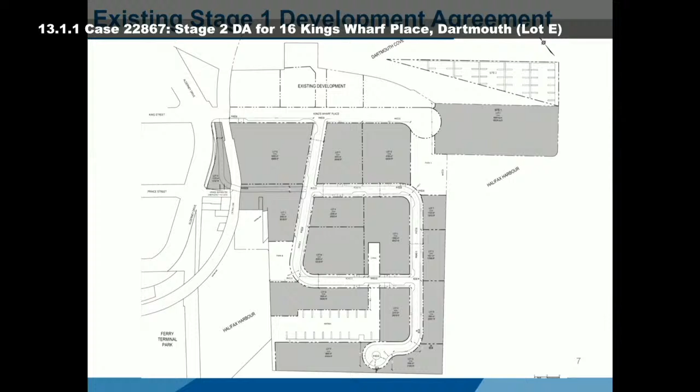This is the lot configuration approved with the Stage 1 DA. Lot E is shown here in red, abutting the CN rail line, Kings Wharf Place, and a new road, Road A, which is not yet constructed.

The proposal is for a 27-story mixed-use tower with an internal courtyard connected underground to a 4-story structure. The proposal includes ground floor commercial uses facing Kings Wharf Place, Road A, and the internal public courtyard, with pedestrian access to the internal courtyard from Kings Wharf Place and Road A. Vehicle access to underground parking would be from Kings Wharf Place. The site would also include a public easement beside the building and abutting the CN rail line to enable a future active transportation connection to Ferry Terminal Park.

This is a stylized rendering of the proposed building as seen from the corner of Kings Wharf Place and Road A. In the foreground is the 4-story structure with a 27-story tower visible behind. This is the elevation from Kings Wharf Place with the tower on the right and the 4-story structure on the left.

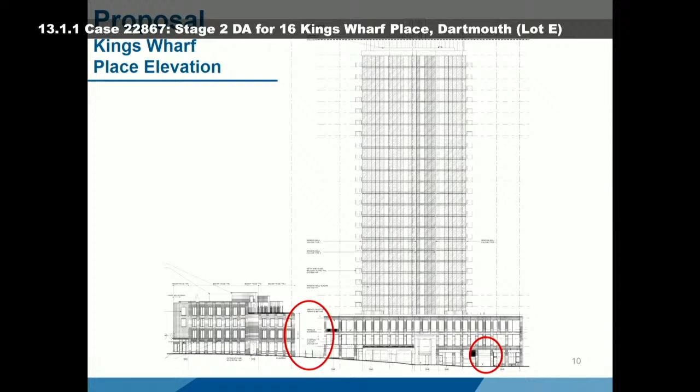Pedestrian access to the internal courtyard would be between the 2 structures. Vehicle access to the underground parking would also be from Kings Wharf Place. The tower includes a 3-story podium with a maximum street wall of 22 meters.

This is still the Kings Wharf Place elevation, here showing more detail of the 4-story structure. This part of the building could have a maximum street wall of 16 meters. The applicant's intention is for this structure to be a hotel use wrapped with retail uses facing the public streets, but the proposed DA is flexible on this point and will permit other commercial and residential uses.

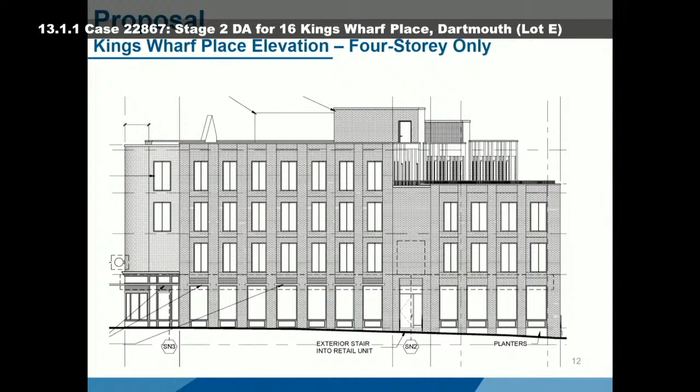This is the Road A elevation of the 4-story structure. There will be pedestrian access to the internal courtyard at the end of the street wall on the far left of this image. This street wall will be a maximum 15 meters tall.

This is the elevation that would face the CN rail line and Alderney Drive. So we see the 3-story podium on the left of this image rising to the 27-story tower.

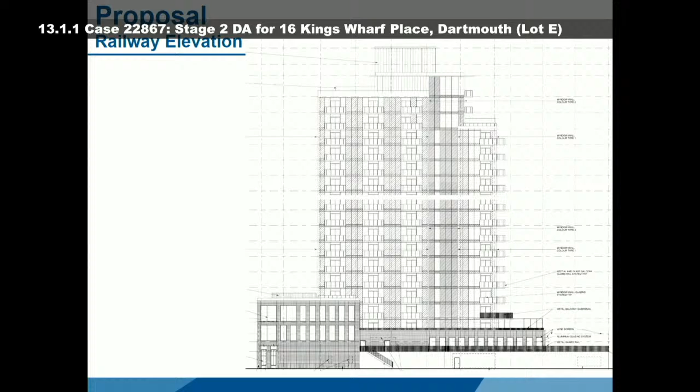Downtown Dartmouth Secondary Planning Strategy Policies W9 and W9B list the criteria for evaluating this application. The criteria most relevant to the Stage 2 DA are as follows.

Development should provide a mix of land uses, including residential uses with a mix of unit types, and high-quality urban design. Buildings should be designed to create public spaces and provide weather protection for pedestrians. Parking should be below grade or wrapped with active uses.

Microclimate issues such as wind, solar orientation, and shadowing should be considered, and pedestrian street level activities should be supported.

Proposals should respect that the waterfront is primarily a pedestrian precinct, and pedestrian circulation should be an important consideration. Buildings should be designed to create attractive and functional public spaces and pedestrian routes. Active ground level uses are encouraged adjacent to public access points and public open spaces. Public art should be provided, and architectural details should provide visual interest to the upper stories and at pedestrian level.

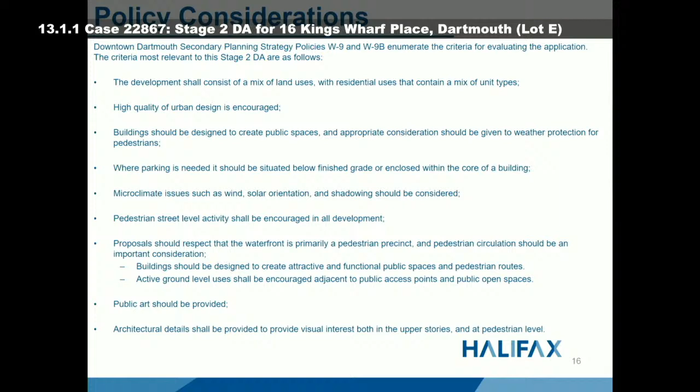The level of engagement for this application was consultation, achieved through providing information and seeking comments through an HRM website, signage posted on the subject site, and mailed fact sheets.

Feedback from the community generally included concern regarding public safety if additional dwelling units are permitted prior to a grade-separated emergency vehicle access into the site being complete, and concerns regarding traffic on Kings Wharf Place relating to vehicles queuing to wait for passing trains.

With respect to the microclimate conditions on the site, the Stage 1 DA required a wind tunnel assessment of the proposed development to evaluate expected wind conditions.

The wind report identified a maximum safe wind speed of 25 meters per second for more than 0.1% of the time from any given wind direction, and the wind expert recommended wind interventions for any area where expected wind speeds exceeded the safety criterion and were worse than existing pre-development wind conditions.

This means wind conditions in some locations on the site would continue to exceed the safety criterion after construction, despite proposed wind interventions. The proposed development would not be expected to make the pre-development wind conditions worse.

To summarize the proposed development: maximum height would be 82.5 meters plus some permitted overruns. Maximum street wall heights would be 22 meters and 16 meters along Kings Wharf Place and 15 meters along Road A. Bicycle parking would be provided in accordance with the land use bylaw for the regional center.

Also, one thing they were running into - if I can just pull these up, these are the two wind maps shown in the wind study. This is the summer image and this is winter. The circles with red and yellow are the problem areas. In any case, I think one of the problems they were running into is if they were going to mitigate wind further, they would have to do something off-site, and we couldn't do that.

It would either be in the public right-of-way - there's a very narrow setback. Most of that sidewalk is actually on public property, so we could do something in the public right-of-way. But other than that, it was quite challenging to improve the wind conditions more than what they've already done.

And yes, the criteria they used was that the wind conditions couldn't be worse than what's already there, and being a windy site, it's already challenging. Yeah, I think anyone who knows downtown Dartmouth well knows it's always about 5 degrees cooler as soon as you hit Alderney Drive, because you really do get that wind right off the water there. So thank you for the clarification on that.

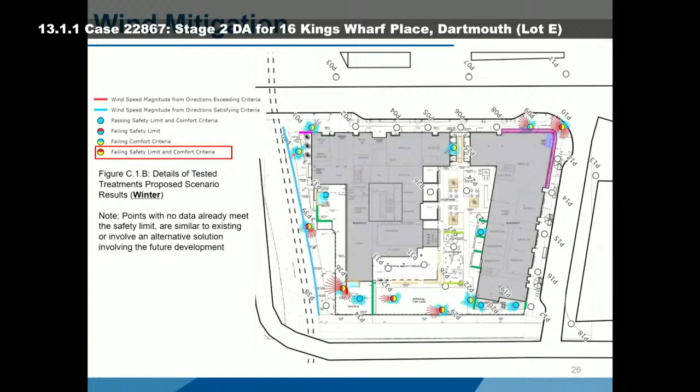To go back to the public hearing for Phase 1, one of the dominant themes wasn't so much design or scale - the community seemed pretty okay with the revised plan for Kings Wharf overall. That second access was one of the key things people in the development are really concerned about. Not everyone accepts that it should be emergency only. That's the decision we made, but others feel we really do need that emergency access finished. So can you speak to that - will it be coming back to council, but they can't occupy any of this building until that is built?

Yes, that's correct. So the grade separated emergency access would be maintained, the ownership will be maintained by the property owner, so as private property, it's a private road. HRM would have an easement over the road, and it would be, like you say, for emergency vehicle access only, it wouldn't be for personal vehicles.

So because it's private development and this property is entirely controlled by the Stage 1 DA, it does need a Stage 2 DA before they can do any development on any of the other lots. So we couldn't approve it with this application because it's not on this lot.

But you're correct, so the way we've kind of stacked the requirements for the grade separated emergency vehicle access: they need to have their design approved by CN and submitted to the HRM development engineer before they can get their building permit. And then they need to have it confirmed or deemed operational by, again, the HRM development engineer prior to occupancy. So it needs to be fully functional before anybody can live in this building.

That's the ramp, is that correct? Is that the same thing? I remember that from the public hearing - there was lots of discussion about the ramp and emergency access. That's the same thing? Yeah. So if I could have the screen up again, if we go back to the schedule that I showed from the Stage 1.

So in the graphic you're showing, it looks like a road there, but in fact it's a ramp, it rises up into it. So it goes over the rail line. Thank you for that. I know there was lots of discussion about that, as the councillor alluded to earlier.

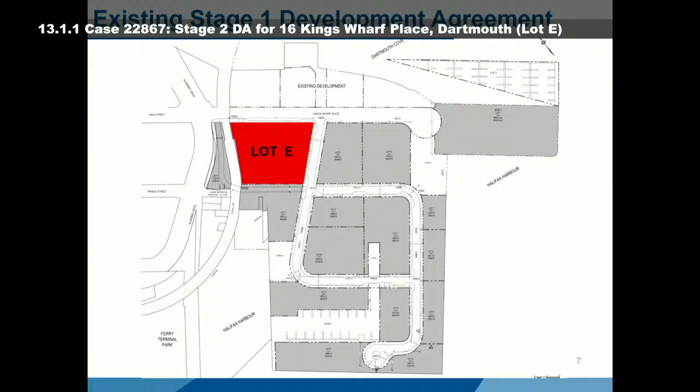I look at what Kings Wharf, the first phase, did to downtown Dartmouth. It was significant, I think. It really brought downtown Dartmouth, it started the ball rolling to what a great community and downtown it is now. We're proud to say we have two downtowns, and I think downtown Dartmouth is just as good, if not better, but that's my opinion. The potential of developing that further with this design, I'm rather excited about what it's going to do for not only downtown Dartmouth, but Dartmouth in general. So I support what's in front of us today.

Thank you, Mr. Chair. Just to clarify for the general public's interest, this is quite a substantial report, 232 pages, if people want to look online and read through it. But just to explain again, this is not a public hearing, but there's an opportunity for appeal. There'll be an advertisement in the Chronicle Herald on Saturday providing the contact information, but the appeal will be filed with the UARB. Just want to make sure the general public are aware of the process.

All right, any further questions? I'll call for the question on the motion then. All those in favor say aye. Aye. Motion carried.